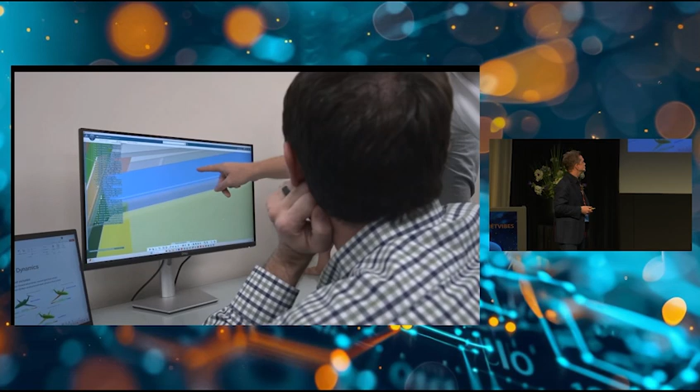Most of the innovation and focus on innovation has been on new fuels, but they're much more expensive. So if you can take an enormous amount of that drag out, reducing the energy that the aircraft requires, then I can use SAF. It's a carbon neutral fuel and consequently does not produce CO2. This is the Phantom, the new business jet, no windows on the outside. We're going to do all digital windows as well.

So you saw a few folks in there. You know, Dennis Muilenburg, former chairman of the Boeing Company, is our chairman. Paul Touw, who co-founded Ariba Software, now part of SAP, is our CEO. And then there's me and Obi.

And you can read our backgrounds here, but the most important thing for us to say about why we're together on the stage is I'm the CTO who has to design, build, test, certify, and produce this aircraft. I'm the user. And Obi is our Chief Information and Digital Officer who provides those tools and the expertise around the digital enterprise. And we believe there's a constant struggle between these two folks.

So we stand up here on the stage as those two executive champions, me telling my engineers, you have to make the switch, stop using those old tools, use the synergy of Dassault, and Obi showing us the way to do it. That's why we're here together on the stage.

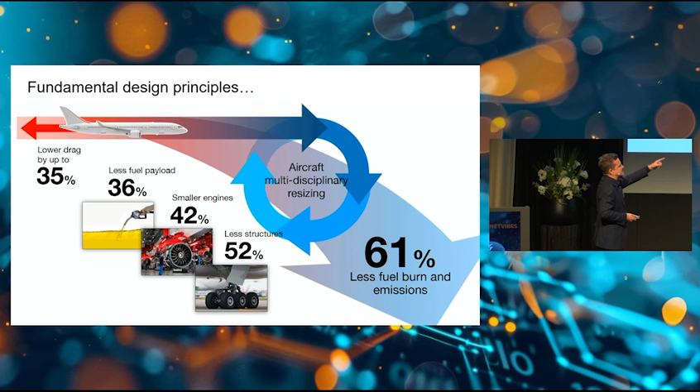So if I put SAF in these engines, that 61% number is going to go up to 91% improvement. And then you'll say, well, but SAF's too expensive, Scott. And you're right, it is for aircraft today.

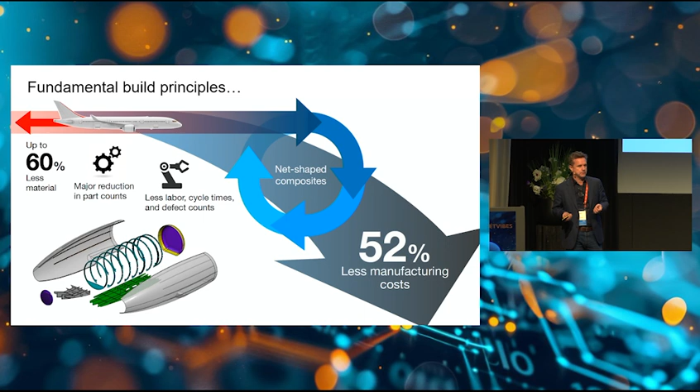But the other effect that lower drag has is it makes that aircraft smaller. So we're coming in at a gross weight that's half of the typical super mids that are out there. And it's because your part counts go down, you use the right composites, and suddenly now your costs are 51%, 52% lower, and now I've given you a green discount instead of a green premium.

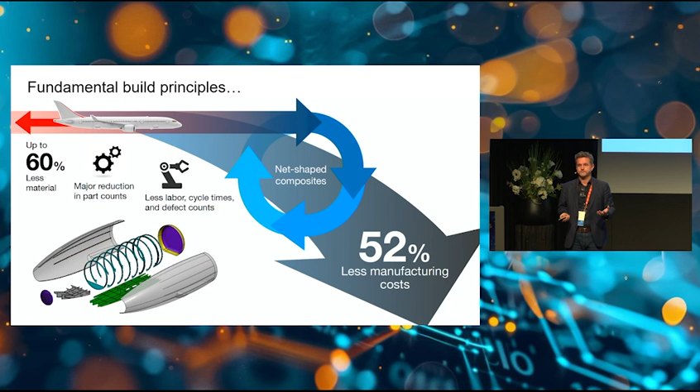And how we get it done is we do advanced simulation and net shape composites that weren't always available in the past, and they are now. You see this technology in all the simulation spaces, and Obi runs that platform for us. And net shape composites means, well, it comes out of the tool intentionally how you wanted it. So it's not wavy, the parts fit together, there's no steps and gaps.

You say, oh, well, don't they all do that? Or some people also say, nobody does that. Well, they do. Stealth aircraft do it for the same reason. They just don't want to be seen. Well, I don't want to be seen either. I don't want to be seen by the air. You can watch me and hit me on radar all you want, but I want us to disappear to the air, just like those stealth aircraft disappeared to radar.

And we're starting from a clean sheet, and I'm going to transition after this, but that's the part that I want to bring to this audience. I believe that your design thinking is always wrong unless you get closer and closer to a clean sheet. So people often ask us, why hasn't Cessna, Bombardier, Embraer, and everybody else done this, and why aren't they going to beat you to it? Because when they start their thinking process, it's not on a clean sheet. It's on, let's extend for 2% range. Oh, I can just use the old wing that I had on that aircraft and plug it onto that old fuselage, and I got my 2%. That's not clean sheet design thinking.

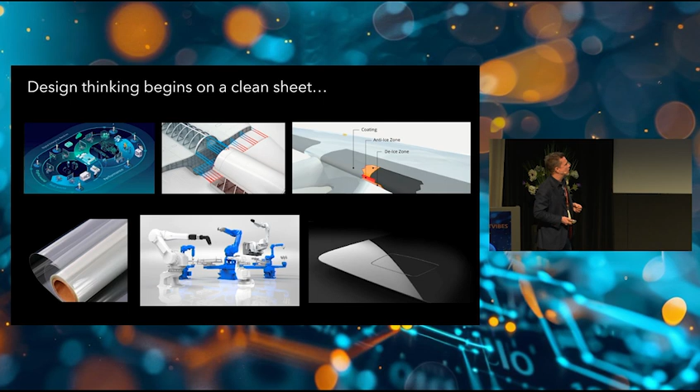So I think this is a great point to transition to Obi's section, where he talks about the digital enterprise that allows all this to happen and give us that chance at the right design thinking process. Thank you, Scott. He's smooth, isn't he?

So Scott talked about the tools that my organization is going to provide to help us enable and build out this aircraft. I want to say at this point a big thank you to 3DEXPERIENCE, Dassault Systèmes. It's really the tools that ENOVIA, the platform, provides us that enable us to build this aircraft. So we want to talk about 3DEXPERIENCE at Otto Aviation. So if I click through, like I said, all thanks to ENOVIA. So the current suite of applications that we're leveraging at Otto Aviation first enables us to really establish what we call our digital first philosophy.

I'm going to click through the next set of bullets here, but I want to pause for a second on this particular comment. Digital first philosophy, I mean, we talk about digital transformation, digital mindset, digital twin, digital virtual twin, a lot of phrases being used. But for us, really, we live the digital first philosophy. What that means, clean sheet design. For us, we're not saddled by legacy systems. We're getting to build the first clean sheet airplane in about 25 years, since the first iPhone or before.

So really for us, it's not a digital transformation. It is, we're thinking digital first. We have a clean sheet. We don't have legacy systems except those that are being brought in by our staff from prior experiences; I'll talk about that in the next couple of bullets. But really leaning into our digital first philosophy enables us to now become a fully digital enterprise.

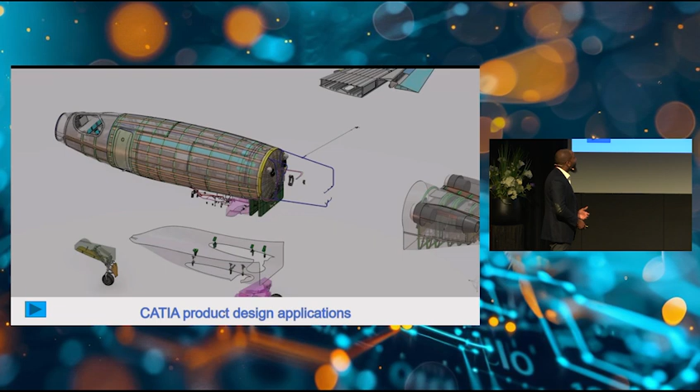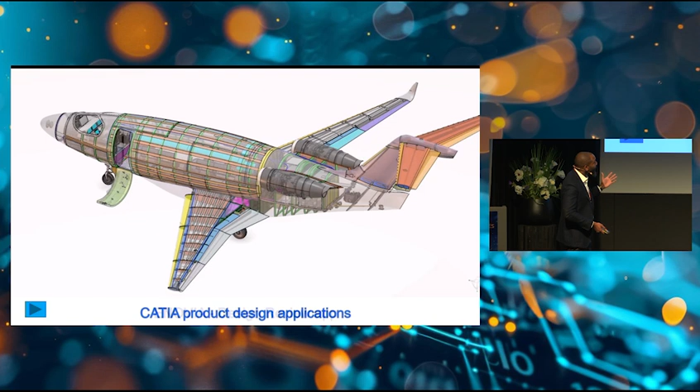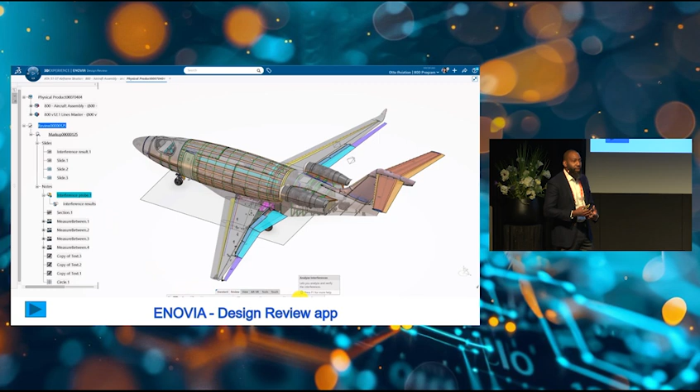So this first video shows our design applications in use. When the design is complete, we're still going through design changes. Using CATIA product design applications, we finished the design. Now we can get into a design review, leveraging the design review app. This really allows collaboration where our engineers can conduct, he talked about parts fitting. You build something, you have to test that it does fit together. We can run interference checks, they run an interference probe. You find an issue, now what comes in?

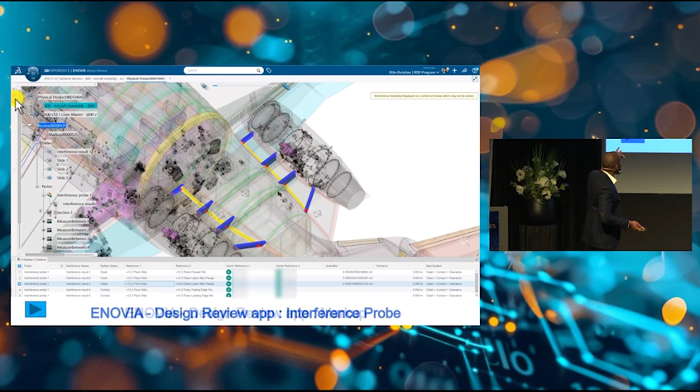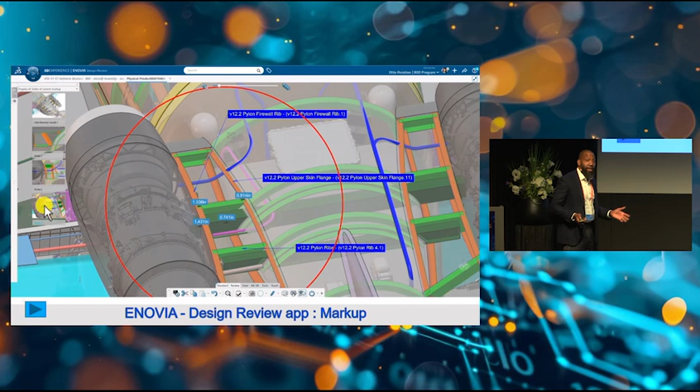Well, we can actually continue to leverage the platform upon identifying where there are potential interferences to create an issue. You mark it up using the 3D markup widget that is part of the ENOVIA suite of applications. Mark up where the interference has been identified. Now, I know I'm getting super tactical and really in the weeds of how we use this, but really this is a show and tell, right? It's how do we leverage the tool.

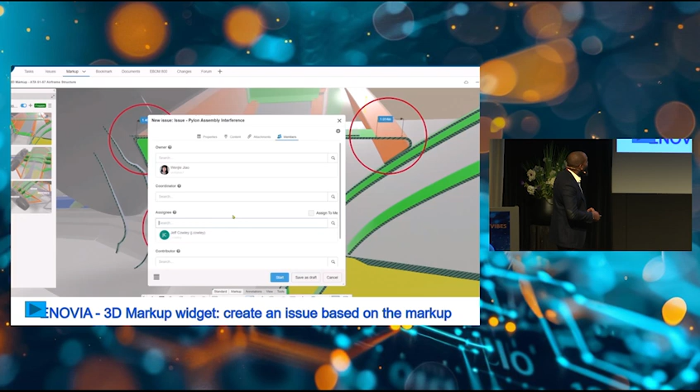With 3D markup, now you can actually append and create an issue, right, with the identified location tagged to it. Create the issue, mark the pylon assembly where you have this specific interference problem, create the issue based on the markup, and maybe I'm going a little bit faster than the video. And then you can assign the issue and save it.

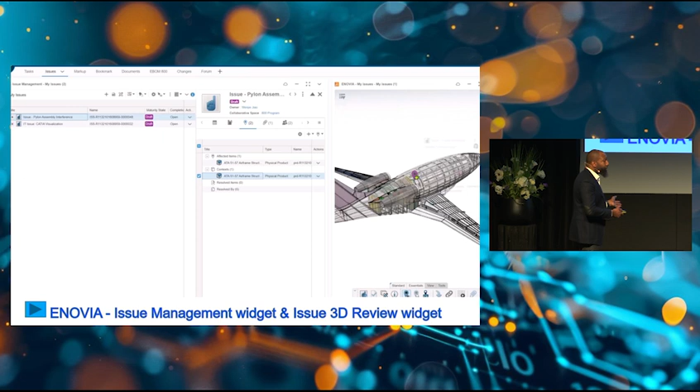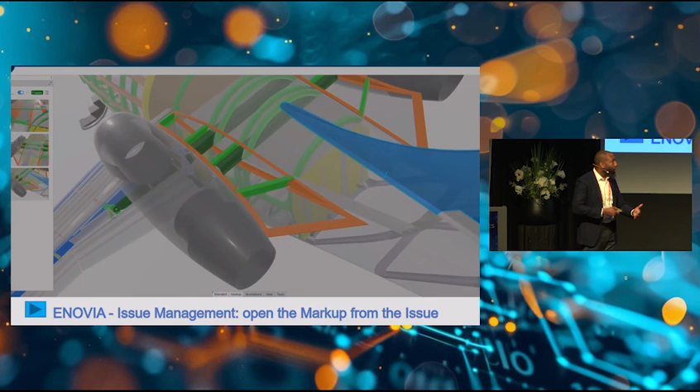The issue management app allows you to administratively track the progress on that issue. They can review, see what the particular problem is, and you can track resolution of the problem using that issue management widget and the review widget. So our team is living the applications, the solutions, on a daily basis from the engineering side. Not only are they designing, they're reviewing, they're collaboratively solving problems and working through our design concepts, making sure that we're leveraging the full suite of capabilities and benefits of working in CATIA and all the other associated apps.

So in the next video, I will walk you through a little less — I'm an engineer, so I bias towards building and designing and doing things, but there's collaboration, there's the actual business of running an organization and managing a product or product life cycle. So our collaboration applications: I'm going to play another video that shows you how our teams use the solutions and applications that are embedded here. So one more click to start.

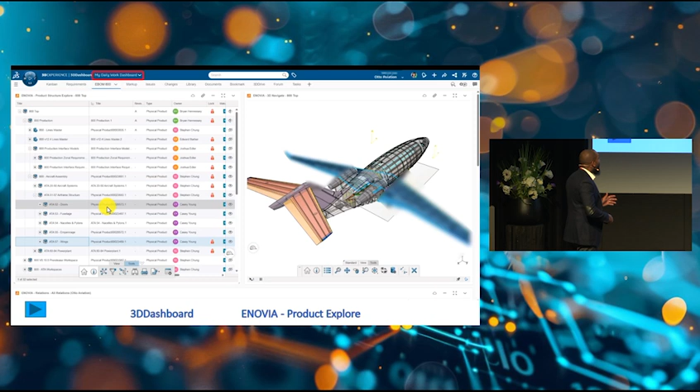There we go. So first of all, about 85% of our employees use the 3DX platform on a daily basis. They start their day with a Kanban board. What does my day look like? What are my to-dos? What's open? And then we can get into Product Explore when you've really necked down the issue that you want to work on that day. And you would forgive us, we did blur out the wings. That is some of our IP there.

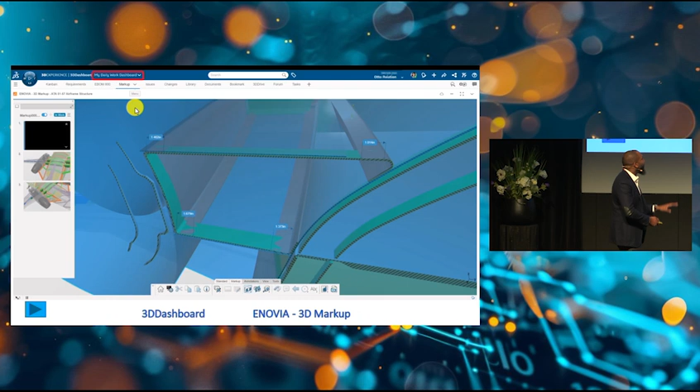3D markup, yet again, you can go in to identify where the issues have been identified, where there's an interference. Now, this individual is drilling down into a particular issue that has been assigned to them, right? So it's been handed off, and they're working it within the application. And you can get a summary of the issue, get some analytics at a higher level, change management. Well, the issue maybe requires a change to resolve it.

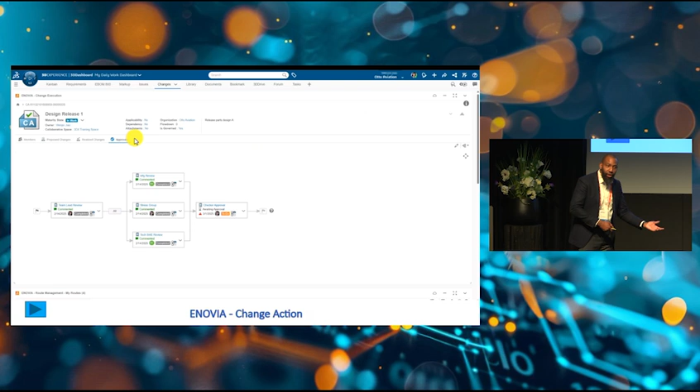We also leverage the fact that you can have custom routing for change processes, for change management and approvals. So we can go in there and create those custom routings. Who needs to look at an issue to approve it and mark it as closed? And so a couple of other applications that they get into, the bookmark editor. These are all collaborative tools that allow our employees to know where they are in the process.

3D Drive, I think you're all very familiar with that. You share, you upload, you save, store information, making it readily available to your teammates and your counterparts to pull the data out. So, 3DSwym community. Again, we're leaning in heavily into using this application, wrapping our entire organization from concept through the manufacturing of an aircraft component or the assembly of it, really living the idea of a 3D environment.

Of course, Project Gantt, we can manage projects, your basic Gantt charts, see where you are in status. So all the way from our aerodynamicists to our propulsion engineers to even our project managers, right? Everyone is within this platform using 3DX and ENOVIA. And of course, we can bubble up analytics results that allow senior managers in my organization to roll up some information, allows me to share some knowledge across the board with my counterparts, Scott, and maybe our CEO on the board.

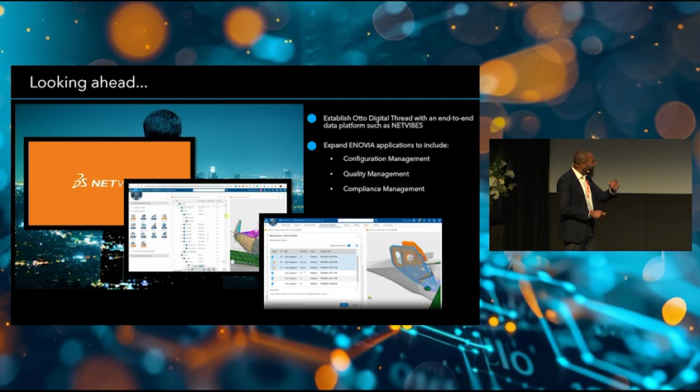And then some more tactical applications. I already talked about some POCs that we have on board, but definitely configuration management, quality management. We talked about APQP today with someone, and then compliance management.

First of all, I think that was very inspiring. By the way, I'm Sachin from Amgen. I am almost jealous of what you're able to do here, starting from a clean slate, because all the other speakers today spoke of the challenges of changing an existing culture. My question is a bit of a long one, so I'm going to read it off my phone. How are you identifying the right tools within the 3DX platform to achieve business processes that you haven't started doing yet? And as a follow-up, do you extensively prototype and do POCs to make sure you get the solution and approach right? Because you're on a critical path. If you get it wrong, that directly impacts your bottom line, right?

So I think that question is definitely mine. Great question, by the way. How are we determining what solutions from the ecosystem of 3DEXPERIENCE and Dassault Systèmes to onboard when we maybe don't have a process in place for that requirement? One step back, Scott and I have this pact where we think the best approach as a vision for our company is we are all fully leaned into 3DEXPERIENCE as our platform of choice. So the first thing we do is put the burden of proof on our business unit, our functional team that wants to meet a particular requirement, to demonstrate that the solution within 3DEXPERIENCE is not going to meet their requirement. So that's step one.